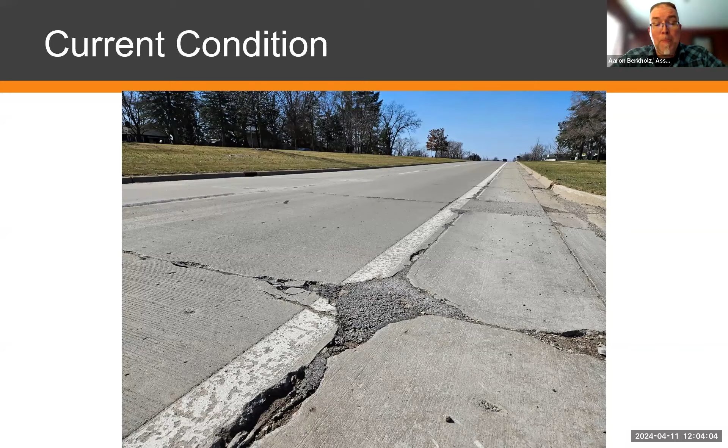So what we reviewed when we considered this project is we looked at a repair of the joints, removing only the concrete pavement at the joints, versus a full concrete pavement replacement. We looked at the impact on traffic. We looked at the cost of those two options. And really, as we looked at it, we are further ahead at this point to completely remove the concrete pavement from those westbound lanes. So we refer to that full concrete pavement replacement as a concrete inlay project.

So, by and large, we'll be saving the concrete curb and gutter that's along either side of the concrete pavement, but the concrete pavement itself will be removed in its entirety, and it'll be replaced with brand new 9-inch high-performance concrete pavement. Next slide, please.

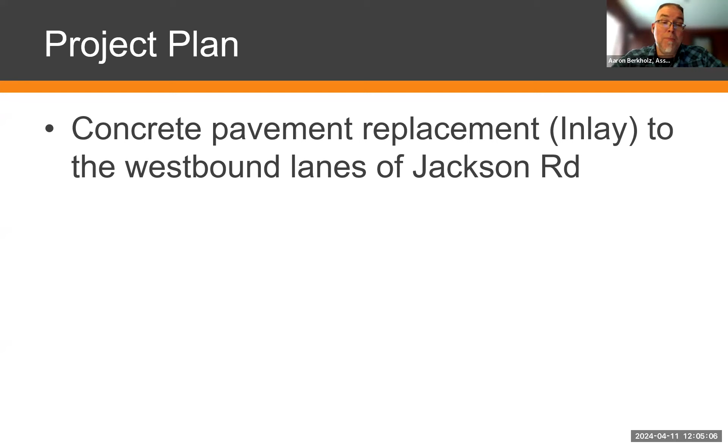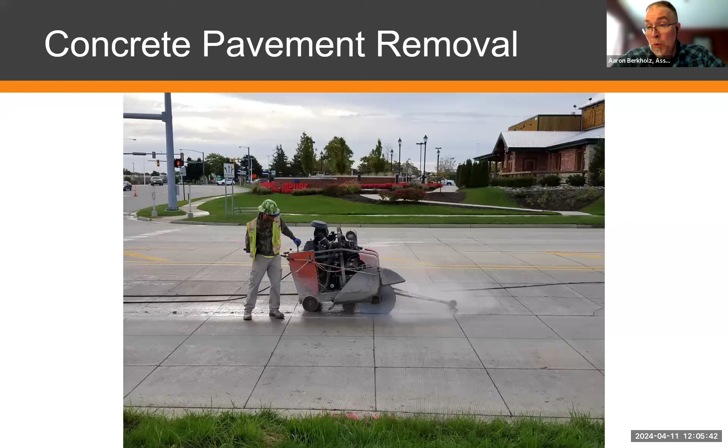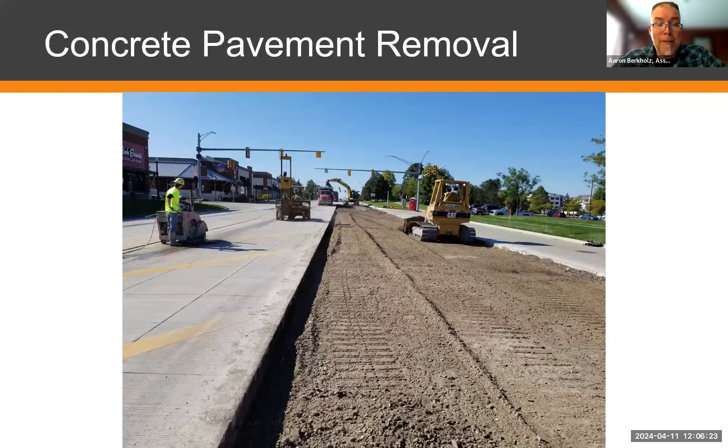So I talked a little bit about the joints on a concrete pavement, and basically wherever you see a transverse joint, and that would be the joint that you drive across as you go down the road, there's a basket, and that's a set of dowel bars that transfers the load of your vehicle from one concrete panel to the next. So just a little bit of detail on how we build a concrete pavement. Next slide, please.

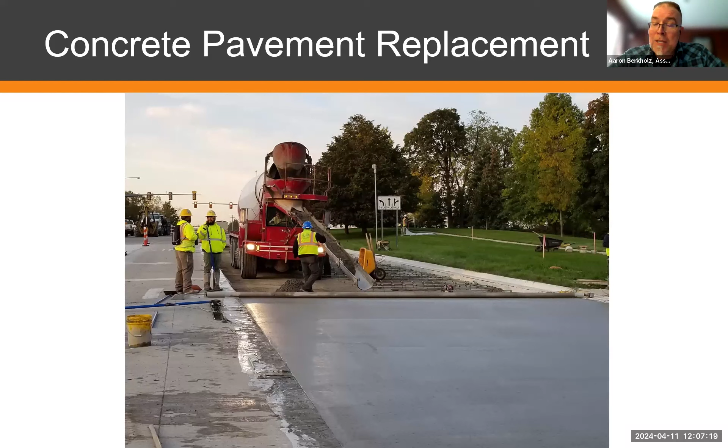So once that concrete pavement has been placed, then you come back with a saw again, and you need to saw the joint lines. And the timing of the sawing of a piece of concrete pavement is very important because the reason that you saw joints into concrete is to control cracking. All concrete cracks. And essentially what you're doing when you saw it is you're telling the concrete where you want it to crack.

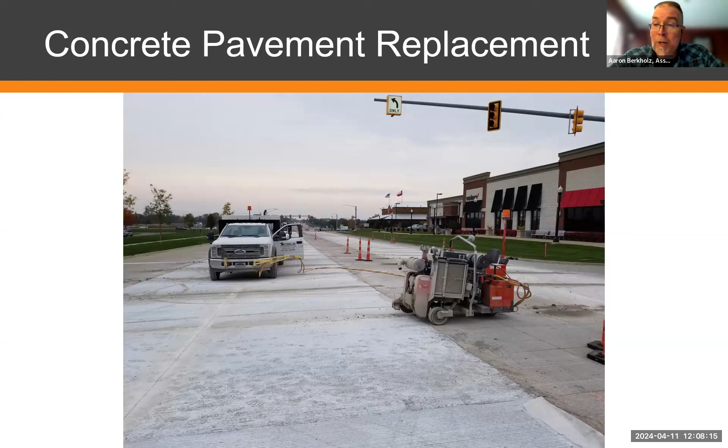If the concrete is not sawed in an appropriate time frame, then you get what we refer to as random cracking. And that's where the concrete pavement itself makes its decision about where it wants the crack to be. We don't want to leave that up to the new concrete pavement. We want to show it where that crack needs to be, and that's what the sawing is after the new concrete has been placed. Next slide, please.

So this is a very busy section of Jackson Road. The average daily traffic is 18,000 vehicles a day, so that's 18,000 vehicles in a 24-hour period. We have a fairly even split between eastbound and westbound. Now, again, we're only going to be working on the westbound lanes this year, but again, you do have eastbound motorists that want to use the crossovers.

Those are commonly referred to as Michigan U-turns. Since this is a boulevard road, you do have those crossovers. And so again, you're going to have some people that are driving in the eastbound direction that then need to get to the westbound side of the road, the north side of the road, if you will. So we will be maintaining traffic on Jackson Road in both the eastbound and the westbound directions.

But while we're doing this concrete pavement inlay project, we will be restricting the traffic in the westbound direction to one lane. So that is going to cause some traffic issues. There are going to be delays as a result of us taking away that lane of traffic. Because again, you can imagine if we have 9,000 cars a day going in the westbound direction, and we have some eastbound motorists that are coming over to the westbound direction via those crossovers, it's going to cause some challenges.

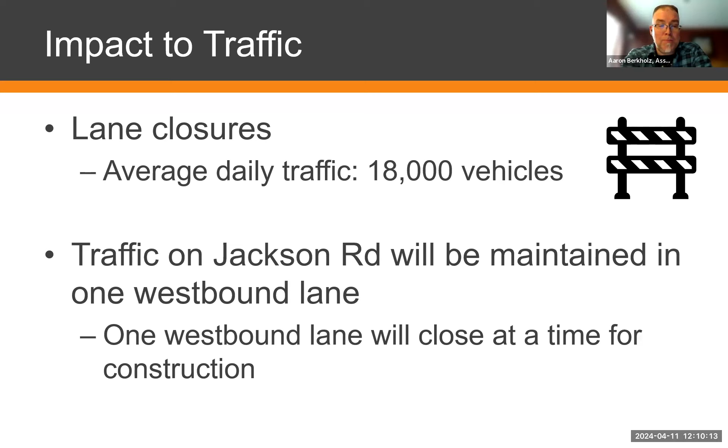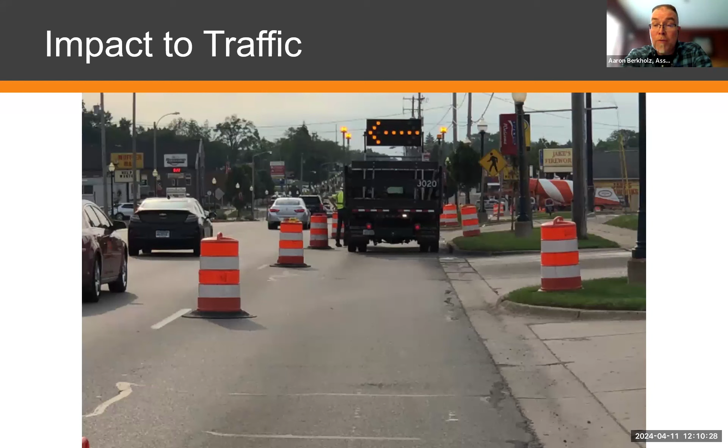So here's an example of a lane closure. I think most all of us have seen this type of a closure. This one, you've got a drum line, a construction drum line that's keeping motorists out of the construction zone. Next slide, please.

We're going to actually start our work on the inside. So when I say inside, I mean the portion of the road that's immediately adjacent to the boulevard, to the vegetated area. That'll be the first step in this project. We'll be removing concrete from that inside lane and maintaining traffic in the outside lane.

So what we can do in this case is when we do start to work in that outside lane, we can actually work through one of the driveway approaches and maintain traffic in the other one. And then once the concrete in the first driveway approach has obtained the necessary strength through curing, we can actually open that new driveway up and we can then close the next one. So again, this scenario is easier.

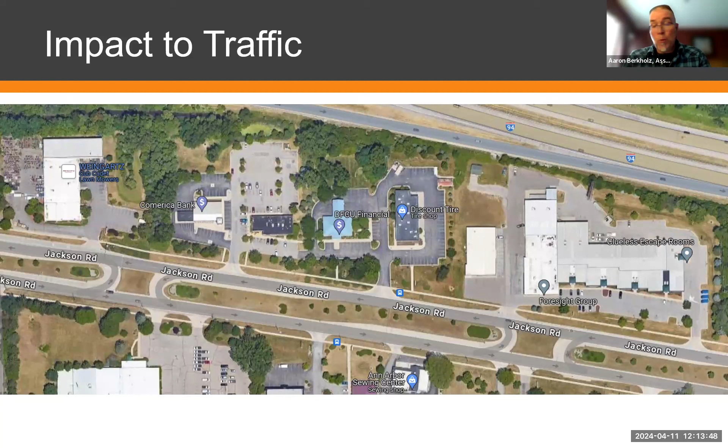And certainly I will be here as a resource for motorists and for the businesses. Should they have complications, I very much want people to notify me of that because we will have an inspector that's on site working with the contractor as they're doing the work. But having more than one set of eyes on a project is of benefit. So again, if there are motorists, if there are business owners that see an issue, I really would like to know about that, and I appreciate that.

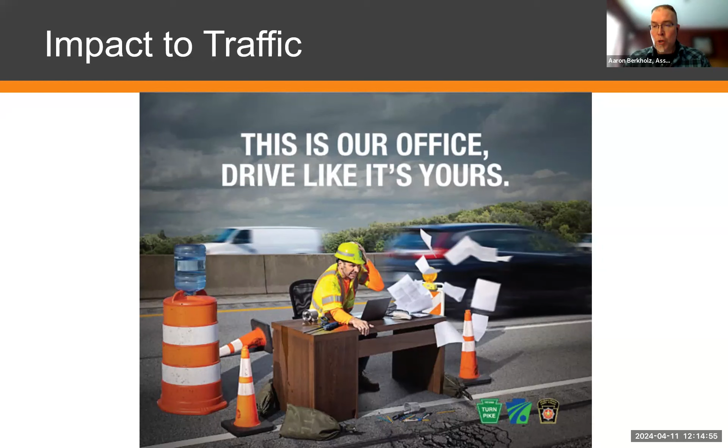A vehicle elected to ignore the closure. There were several barricades up in place. There were road closed signs. It was abundantly clear that this intersection at Ann Arbor-Saline and Wagner was closed. And the motorist, it was during off hours when no one was on site. They elected to drive around the barricades, through the ditch, and back through the intersection on pavement that had just been placed.

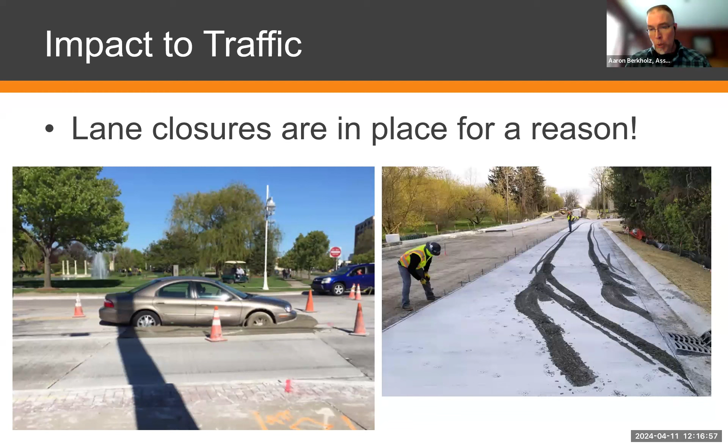And I've talked previously about the steps that are involved in the construction. And I've stated a couple times that one of the steps we have with concrete pavement is concrete pavement has to cure. And it has to cure long enough that it attains strength to carry a vehicle. Usually that's in about 7 days, but weather has an influence on that. And so we will be testing the concrete. And when that concrete has obtained the necessary strength, then we will go ahead and we will open it up to traffic. Next slide, please.

So this project is being funded by 3 sources. We've introduced money into the project from the current road and non-motorized millage. So the current millage is for the years 21 through 24, and this project was identified as a part of that millage. And so that's delivering on the promises that were made during the establishment of that millage. We identified at that time that we would be investing money in Jackson Road, so we're following through on that commitment.

Also, a good portion of the Road Commission's budget comes through Michigan Transportation Funds. And Michigan Transportation Funds are generated from fuel taxes and from registration fees. And so we're taking a portion of our budget, the Michigan Transportation Fund, and investing that in Jackson Road. And then we're very thankful, we're very appreciative of the fact that the Scio Downtown Development Authority has contributed to this project as well. So we have 3 funding sources for the project.

The estimated construction cost is $1.7 million, and that is significant. And there may be those that see the extent of the project being from Jackson Industrial Drive at the west end and Myrtle Avenue at the east end, and it being only the westbound lanes, and may wonder why it would be so much money. Why would it be $1.7 million? And a big part of that is because concrete pavement is very expensive. Now, it's very expensive, but once constructed, it lasts for quite some time.

Okay. Now we can open the presentation up to the question and answer portion. If you're viewing the meeting from your computer, first make sure to click on Join Audio. You can then raise your hand by clicking on the Participants or the Reactions button at the bottom of your screen, and then the Raise Hand button at the bottom right of your screen. If you dialed into the meeting from your touch-tone phone, you can raise your hand by dialing *9.

As the meeting host, I will unmute participants with raised hands one at a time. I will announce your username or the last 4 digits of your phone number when it's your turn to speak. We are happy to answer as many questions as possible. Just please be respectful of each other's time. If your question is answered before you are called on, you can lower your hand by clicking on the lower hand button or by dialing *9.

So does anyone have any questions that were sent in the chat? I am not seeing anyone with their hand raised. I do have one question in my chat for you, Aaron. George was saying that he owns a business near Independence Plaza on Jackson Road, and he was just concerned about residents and customers being able to access his business. But as we've emphasized in this PowerPoint presentation, we are going to ensure these businesses have access.

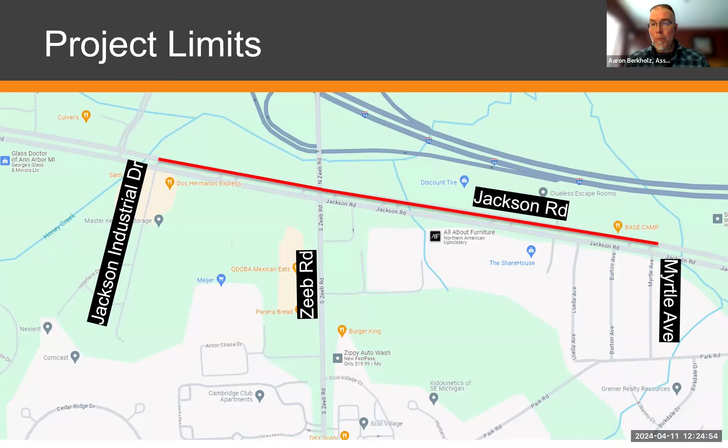That's correct, Emma. Yeah, and as we talked about earlier in the presentation, we're being mindful to providing that access through either closing one driveway and allowing access from another, or conducting the work part width. Again, it is going to complicate the movement of traffic westbound along Jackson Road, but we will be maintaining that access. Awesome.